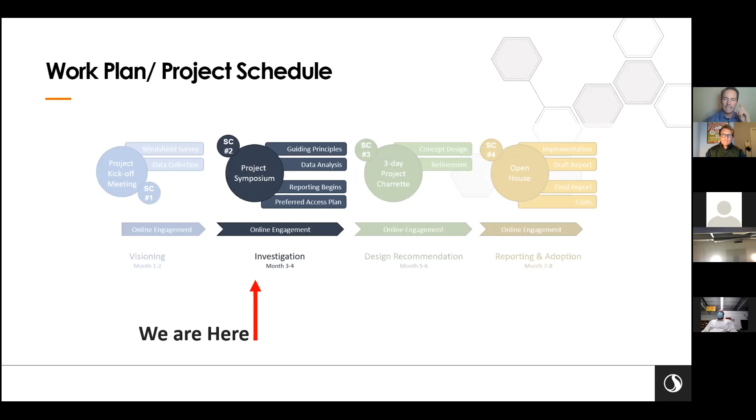They are our partners here, and why? Because they own and operate this road. So we need to make sure as we go along here, we not only design to their parameters, but we bring them along so that they can hear what the people are telling us, what the community is telling us.

So that's important. COVID - I'd be remiss again if I didn't talk about COVID and the impacts we're having. We're virtual tonight, and we all understand that. Your mayor's even wearing his mask as we speak. So it's important to us to stay healthy, stay safe, and do the proper protocol for COVID. A lot of the interaction is going to be online, unfortunately, or virtual, and so please respect that.

Hopefully down the road, we'll be able to meet each other face to face, but we're going to make sure we've done this. This is not our first time doing this - we've done several projects this similar way over the past year, and it's really been great. It allows us to be open and responsive because we're not going anywhere, neither are you, so you can pick up the phone and contact us.

What do we know today? Dan, you want to take over? Let me go ahead and unmute myself, Mike. Thank you.

So if you remember from the last slide, the previous phase that we were in was that beginning investigation phase. For the past month and a half, we've been collecting information on 15th Street, this really important corridor for your city, to better understand what's going on - what are the challenges that are presented, how are people using the corridor, and ultimately gauging your feedback as well - what do you perceive as being the challenges?

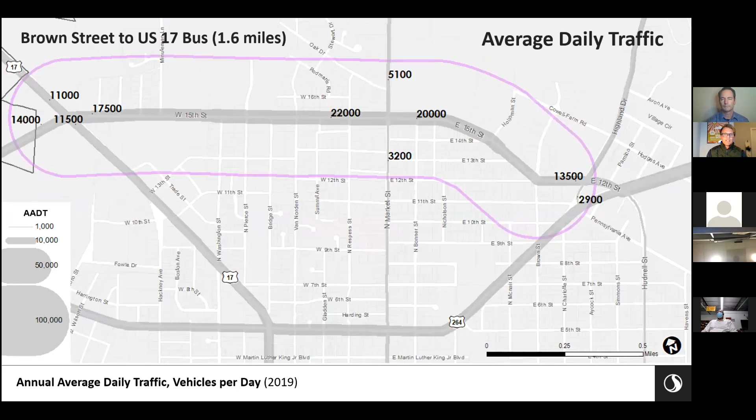One of the things that we've first seen is that this is a major corridor for Washington. For a town of your size, we see a lot of traffic moving up and down 15th Street, east and west on a daily basis - as much traffic as major corridors in towns much larger than Washington. So this is clearly one of the most important streets for your town, and it's really important that we accurately and appropriately capture how folks are using it and how they would like to use it - not just how you're using it currently, but perhaps how you aren't but would like to.

When we look at a street though, we look at 15th Street, we don't just look at what's the traffic volume that's moving down the road. We want to look at it holistically, not just what's going on between the curb, but also what's happening outside the curb. This profile helps us to understand some of the characteristics as you're traveling from US 17 all the way over towards Brown Street - what are the conditions and what are some of the characteristics that we see, and how do they relate to each other?

One of the first things that we see is that, again, there's that high traffic volume relative to the size of the town that you have.

One of the key things you'll see here is no sidewalk facilities of any kind. If you look in that map above, those orange lines represent sidewalk segments in the town of Washington. You'll see nothing traveling from west to east on either side of the corridor.

That's particularly significant, especially when you look at the number of bicycle and pedestrian crashes we've seen. On that second line, despite the fact that we're seeing a lot of traffic on the corridor, we're also seeing a large number of fatal and severe car crashes, as well as bicycle and pedestrian crashes. That's particularly the case just off of 15th Street, inside of that pink study area.

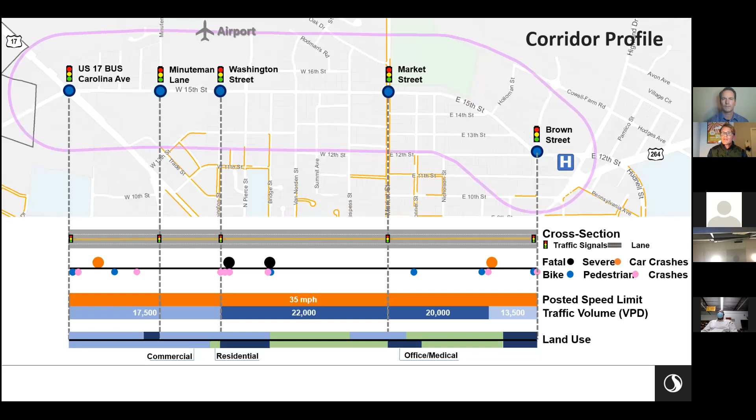On this next slide, we're looking not just at the fatal and severe crashes, but all of the crashes happening along the corridor, looking at all the intersections and where we're seeing problems. What this data tells us is that 15th Street has a crash rate almost 1.4 times the state average for similar roads. That's a really high figure, and it tells us that the current 4-lane approach on 15th Street isn't working. We shouldn't see a crash rate that high.

We also know from this data, though it's not represented here, that the highest proportion of these crashes are turning crashes. So we look at that and ask, what's causing those turning crashes? It may be the lack of a dedicated turn lane. Those are the kinds of things we're taking into consideration.

On this map, you can see your big intersections with high crash frequencies right there at Washington Street, around the Washington Square Mall, and also Market Street, another major corridor for the town of Washington. There's a higher degree of activity closer to the Washington Square Mall, but there's still a lot of accidents happening elsewhere. Critical to creating a complete street here that functions for everyone is resolving what's causing all these accidents.

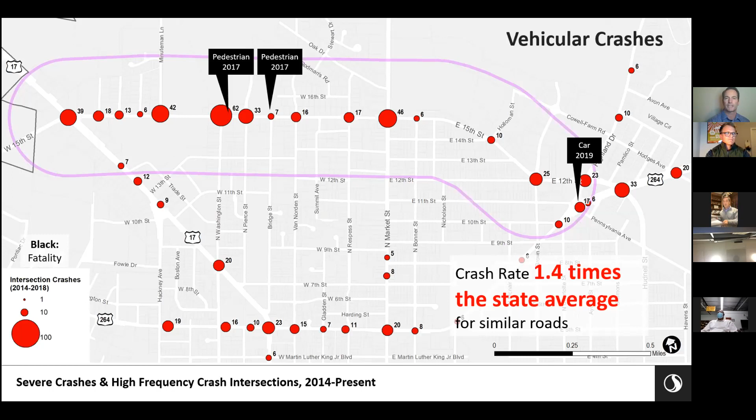Another question we have here: are those spots with fatalities where pedestrians must either cross 15th or use 15th rather than side streets? Yeah, you are absolutely correct - that came from Dominique.

So here on this next slide, you'll see bike-ped crashes. This is looking at where people might want to use the street, whether on bicycle or by foot, and are having issues. You can see there's a couple clusters on the west side, again as we'd expect around the Washington Square Mall, where there's going to be a lot of commercial activity.

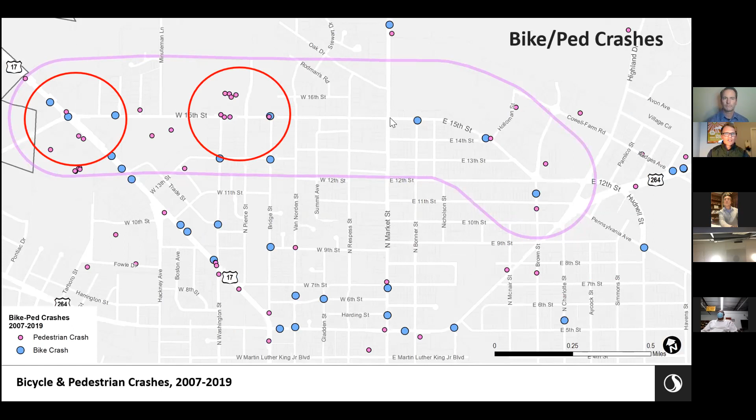So apart from the data we've received about how people are using the road, we also wanted to gauge your perceptions. And quite frankly, we've gotten a lot of response so far: 308 survey responses, 201 interactive map comments.

Some of those you can see on the right side of the slide, pointing out things like speeding is an issue here, and issues with not being able to safely cross 15th Street, right over by Market Street, where one of the pedestrian fatalities happened. We're also looking at comments about how you'd love to be able to walk, but it seems too risky, so people are choosing to drive instead.

So Mike, you can go to the next slide. Yeah, I'm just going back to the chat box. You know you're gonna get it.

Mimi Spear has a good comment here about the fatalities along 15th Street, saying it's because of excessive speeding. Another comment from Mimi said there were two fatalities, one near Hampton Inn on 15th, and another on 15th at Brown Street, before Tractor Supply.

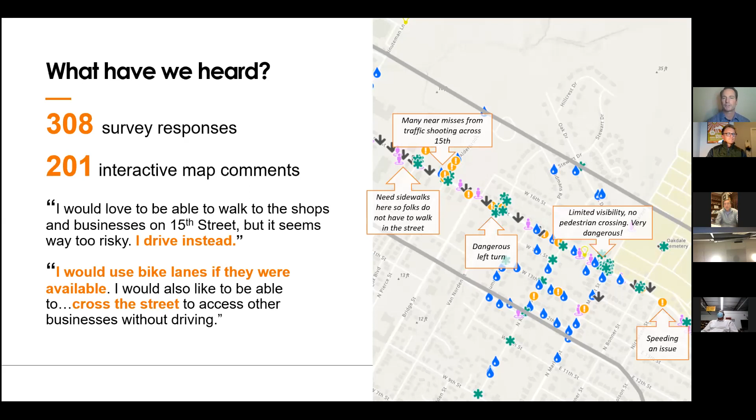Fantastic comments so far, keep them coming. So when we look at some of the responses to the survey, what is it telling us about how you'd like to use the road and what you see that it's missing?

What we see is that 15th Street really is both a critical destination—almost a fifth of respondents say they use it to travel to a business, to get to Vidant Health or another medical clinic up and down the corridor—but also as access to major highways. So it's home to both local traffic and through traffic back and forth each day.

We asked what your biggest concern is, and overwhelmingly it's the 4-lane cross section, the fact that you're missing that turn lane. And when you look at the second thing, safety and crashes, it's those turning crashes that are the big issue. So there's clearly a problem with not being able to safely make turns here as a function of how the road is designed.

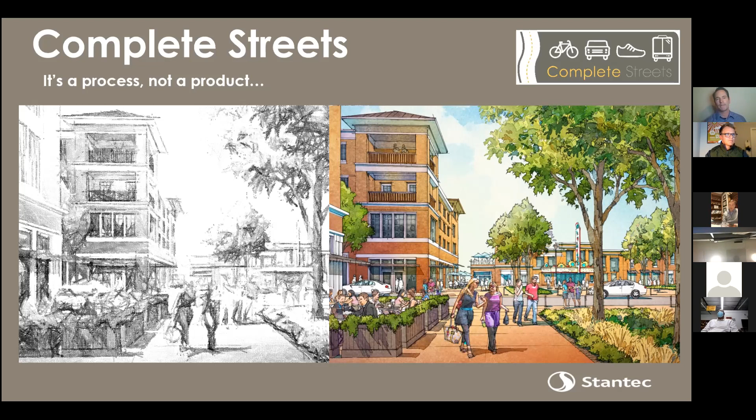What are complete streets? There's a misnomer—it doesn't mean providing for every single mode of transportation and freight mobility. It really comes down to three things: a complete street should be safe, comfortable, and convenient for all users. That's the premise, and they're all designed differently based on the functionality of the corridor itself.

So that's really important to understand. The process is another thing that I've defined over the past 10 years of focusing our attention on retrofitting streets. And let's face it, 96% of complete streets are retrofitting a problematic road, right? It's either a congestion issue, a safety issue, a lack of multimodal issue, or an economically depressed corridor. Some of them have a combination of that, which you do as well. I would say lack of multimodal, and you got some congestion and safety on there. So first of all, we need to define the problem.

I think that was one of the things missing when this project was initiated 4 years ago. We never took the time to sit down and look at the data, tell us what the data tells us, and tell us what the people tell us. Perception in this case is everything. If you feel unsafe walking across the street, that's an issue we cannot ignore.

So define the problem first, and then prioritize modes. We cannot do everything for everyone. We can't put all modes as a priority. So we need to understand who has priority along the corridor.

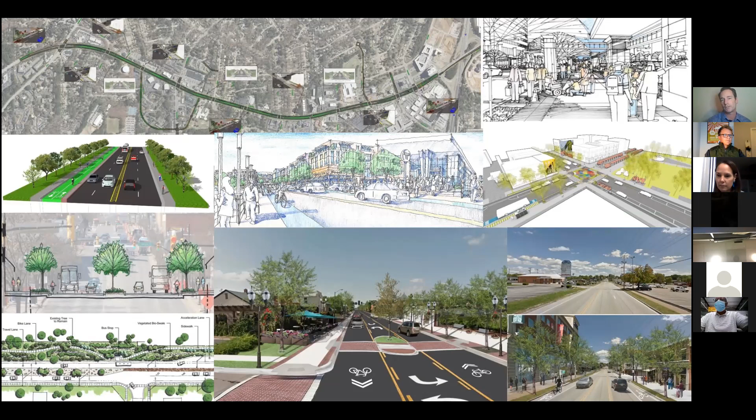And I'll stop in a second, Aaron, you can chime in too. But one of the things we did here, and I think Mary Day, you're pretty instrumental in sharing this - I think Scotty was another one, James, you're on the phone call as well. And you all brought up the issue of crossing the road. That's really something that we need to design into this and make better passageway for bicycle, pedestrian, and transit users, and make it predictable.

One of the things you told us, it's a 4-lane road. DOT is not building any more 4-lane roads. This road was once a 2-lane - in fact, it was probably a dirt road 80, 90 years ago. And then they resurfaced it, they surfaced it with asphalt, and then they widened it to 4 lanes. And so its function 80 years ago is completely different than the way it's functioning today. So why aren't we redesigning the road to accommodate today's function and the way it's being used? I'm going to stop there. Aaron, any comments?

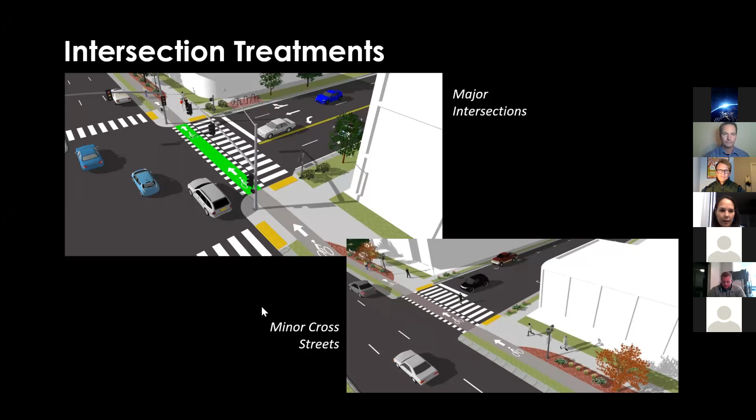Mike, we're getting a lot of questions about speed and speeding being an issue, and whether speeding is documented on that road or just assumed, and how that might be handled moving forward. Oh yeah, I see Fonda - thanks for the comment. Is speed documented or assumed? We've got access to some data, but we'd have to coordinate.

Aaron, that'd be a good thing - let's coordinate with the police and see the number of calls they've had, if they've done a speed gun exercise. If they haven't, it would be great to do that. I'd say most of the speeding happens outside peak hours, only because there are fewer cars and people have free access to both lanes. But yeah, I think that would be good to put on our action items. That would be fantastic. So Fonda, very good comment.

Mimi also says yeah, it is one of the biggest problems - they do not drive 35 on 15th Street. Excellent comment. Hey, Jonice is here too.

Good to see you chiming in, Jonice, and I hope I didn't slaughter your name again. The population of pedestrians includes public housing - this is a large population of walkers. Yeah, that bears repeating. For some folks, this is their mode of transportation, or bikeway too, so we need to be cognizant of that, which is terrific. And Gwendolyn agrees with your comment there, and so does Attila.

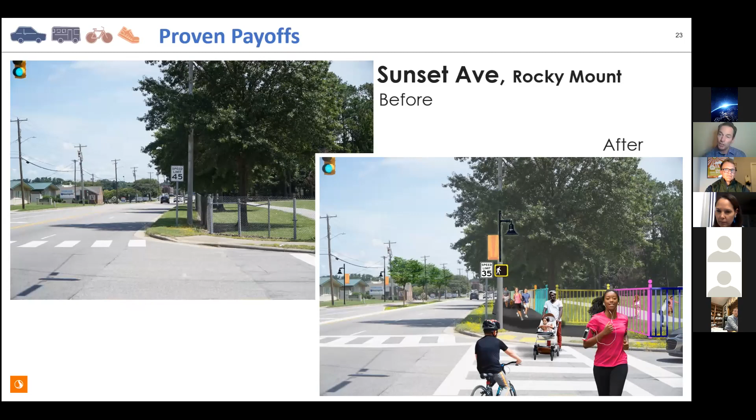So we did want to share with you some other similar projects. Some folks say, hey, where's this been done before? Sunset Avenue, just finished that up. Honestly, it's a 5-lane road with huge gaps, no sidewalks, and very similar, in fact 2.5 miles, but it has everything that you guys have: single family, multifamily, big box, grocery stores, medical clinics, and the like along the corridor. So this is kind of what they went with too, really emphasizing better amenities for bicycle, pedestrian, getting across the road. Pedestrian level lighting was a huge issue there, and so was creating gateways into the community.

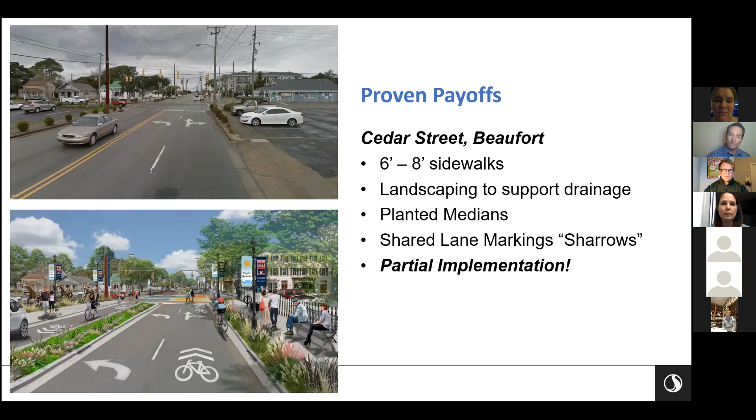Partial implementation, basically what we mean by that is an NCDOT, the same division engineer, the same person that's assigned to our project here on 15th Street, was instrumental in moving some of the improvements along and making those physical improvements. So huge success story there. Last but not least, another proven payoff, Avondale Drive in Avondale Estates, Georgia.

It too was a 4-lane and 5-lane road, very similar to what you guys have. And they chose to go through a road diet. We ran through the options. Widening was almost impossible, just like it is for you guys. And they chose to bite the bullet, and there are some trade-offs there about slowing cars down and stuff.

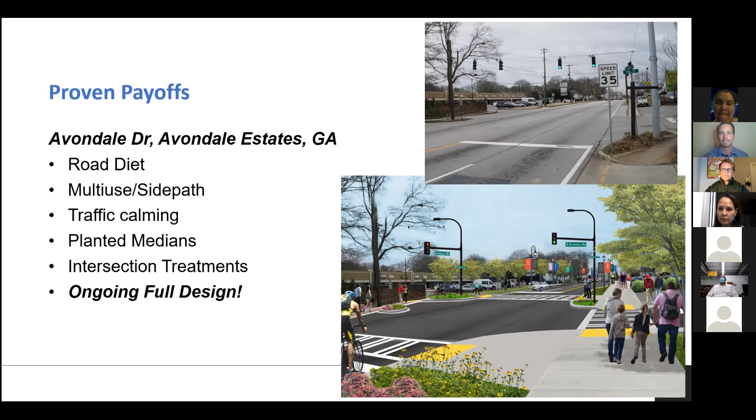All right, here comes the fun part. I'll stop there. Aaron, is there anything from the chat box worthy of sharing with these kind folks? Yeah, I think one more from Mimi, just asking if medians will have breaks to make a right or left turn.

Yeah, here's the thing on intersecting streets. That's a great point. You've got 4 lanes right now, right? And we've heard it, and I've seen it before because there's a roadway that's 4 lanes in Raleigh, and it's horrific. Whenever, and we hear it, everybody on this phone who has ever been behind a wheel on 15th Street has experienced this: that dreaded car that takes a left turn. What happens? You jockey for position, you look in your blind spot, and you weave over to the outside lane to go around that car that's got its blinker on. And everybody is white-knuckle driving. So the lack of that, what I call the flip-flop lane, it's also called a suicide lane.

We want to control that a little bit. And I would recommend for you folks here that we look at an opportunity to put that in without necessarily widening. There might be some options down the road. If we do put in medians, I would think you would want to do that only in dedicated areas that would slow down cars and create that sense of enclosure, but still keep it open to provide left turn opportunities all the way through the entire corridor.

All right, this is where the fun part is, and we're going to ask you to vote. So I'm going to open it up, and we're going to have 8 or 9 questions, and we want you to vote. We're going to keep that and memorialize it because we're not only videotaping this, the results will be reported on Aaron's website too, which is a lot of fun. So let's jump right into it. We're almost halfway through our symposium. I think we are, so this is perfect timing. I'm going to start the polling, then I'll get into our first question.

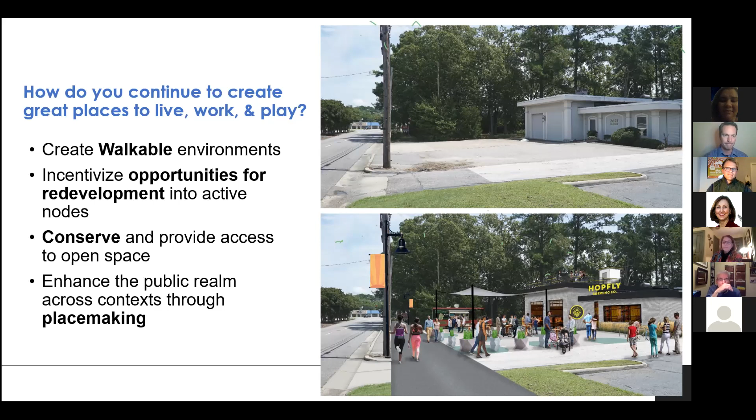So our first question related to placemaking tools, and this is a visual question, and I hope you appreciate this. I'm going to go to the next slide. We have two more.

Launch the polling. All right, select your top 3 placemaking elements. All right, your top 3 this time: A, ambient lighting. B, flexible seating. C, interactive play. D, public art. E, interactive water or fountains, or F, outdoor dining. Please vote, and again, pick top 3.

You're fine, I just want to get a sense of what people are looking at. And this is kind of visionary - I don't see any of this necessarily along the corridor, the 1.6 miles right now.

So it'd be kind of to think about long-term down the road. There's certainly areas that are dilapidated or not the highest and best use of property in there, maybe have turned over and used for something else that could benefit from a reinvestment.

You never know. Oh, people are excited about this one. Ned, you got them excited. You're gonna like the results here.

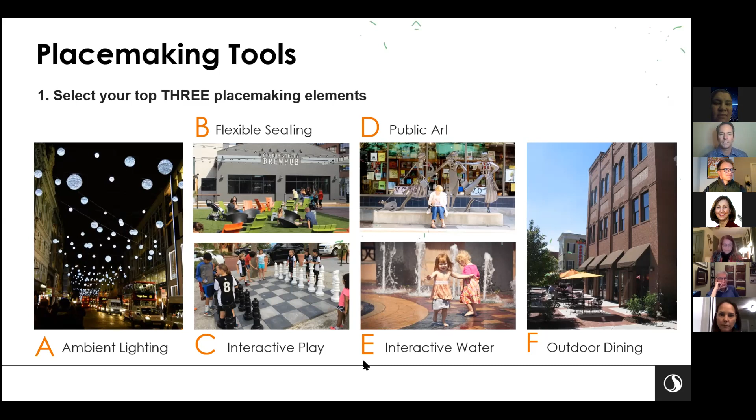Second question related to public spaces. Who knew we were going to put that in there? Again, Mary Day is not a plant, nor is Ned, but this just happened to be things that we think about in common fashion.

So question number 2 related to public spaces: select your top 3 public spaces elements. Multiple choice: A, what do you like to see? Passive gardens. B, flexible lawns. C, play spaces. D, community gardens. E, greenway trails. F, conservation. G, flexible plazas. Or H, alleyways and courtyards.

Awesome. And again, this is not a scientific survey, which is funny. It's funny when I talk about alleyways and how people are reinventing them—you don't have a whole lot on here, but it's funny when you just suggest that before people, it sticks in their mind and they vote for it. So not a very scientific survey that we're doing here, but it's what I call a visual preference survey. It's great and meaningful.

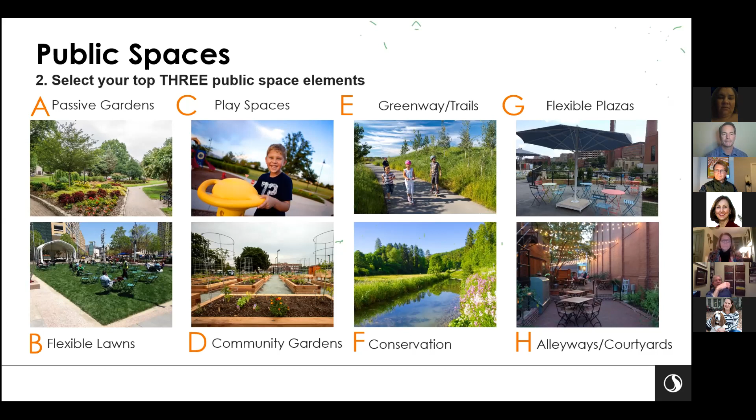Oh, we got that. So I'm going to turn this over to talk about next steps. Actually, I'm not going to turn it over. Our next big event is going to be a multi-day design workshop, also known as a charrette.

Emergency response and travel time is essential to them, so they may not care about streetscape or crosswalks. They care about getting from A to B the quickest.